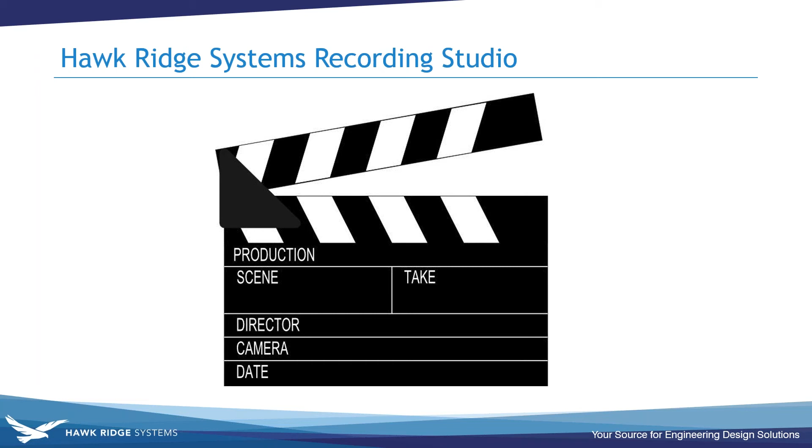Good morning everyone. Let's start talking about our story and what we're going to be going over. Here at Hawk Ridge Systems, we decided to get a recording studio where we feature different products, interviewing the product managers and specialists in a live camera room, and then create video footage over it.

In doing this, we've done a couple test runs already, and I work with the product managers here a lot, and some people tend to get more camera shy than others. So we've decided to come up with getting a teleprompter, so they can look more into the camera. A lot of the time when someone's in front of a camera, they look down, or up, or to the left, and we really want them to focus on the camera.

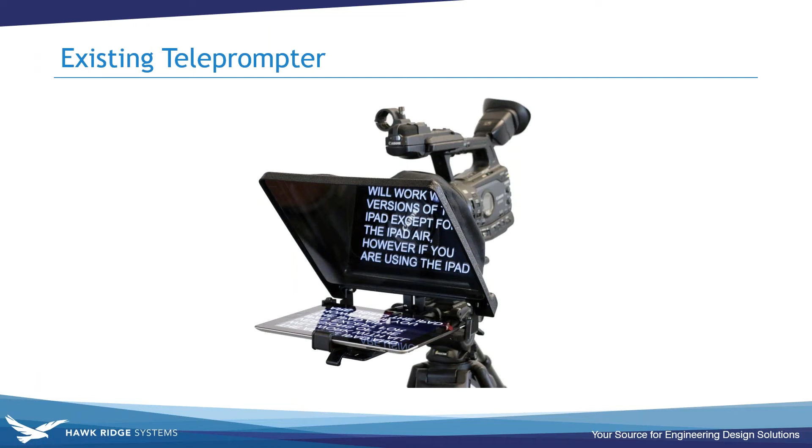To help gather their thoughts, we decided a teleprompter is a good way to go. We're able to mount something on the tripod to the camera in between there and have it extend out past. Here's an existing one I can purchase online, but I decided that we have 3D printing here at Hawk Ridge Systems as well, so I should be able to design something just for the needs that I have at Hawk Ridge Systems for an iPad teleprompter.

So I went ahead and called our 3D printing expert, Luke, for some advice. I've never actually designed to print before. I come from a machining background where I was working more in CamWorks, not on printers. So Luke, I'm going to pass this on over to you.

So I showed this all to Luke, and he was able to help me out and give me some insight before I went in and started my design.

Yeah, so when talking to Holly, what I decided is I wanted to print an end-use part, and the technology I wanted to use was the HP Jet Fusion 4200 printer. The reason is this prints end-use parts. Before, with a lot of 3D printers, they were more for prototyping - they would degrade over time, or they were weak, or they just weren't accurate enough. So with this new technology, it's great: you print it, you prototype, and you can go into production with the same printer and the same part.

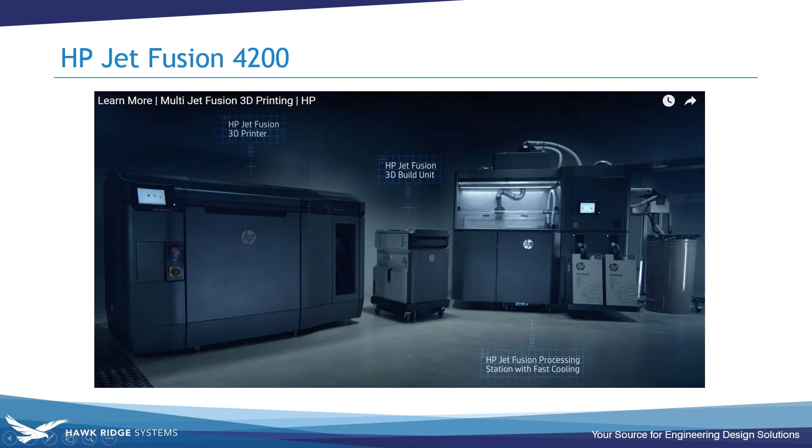What we're looking at here is actually the whole solution for the HP printer. So it's a printer, and you'll also have two of these build units. You can have one of the build units in the printer printing, while you have another one in the post-processing unit. What the post-processing unit does is, one, you can recycle all the powder out of your build that's unused. It'll take that powder, put it in the drum off to the side, and you can reuse that for the next build. So for your next build, when you put the build unit in, you can repack it with 80% recycled material and only 20% new material, and that dramatically drops the price of printing.

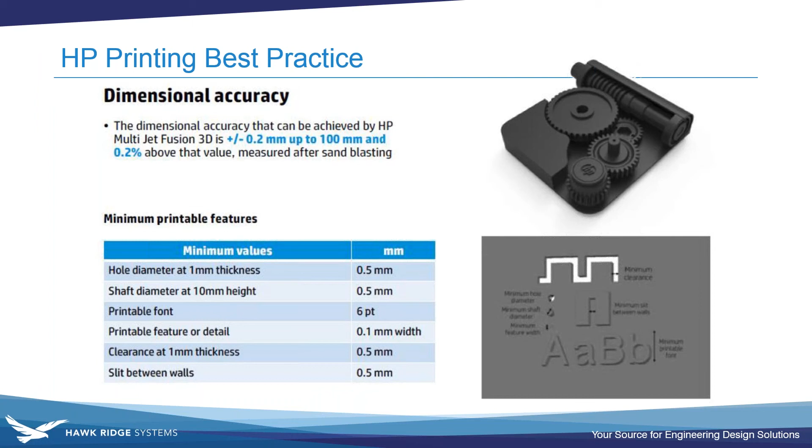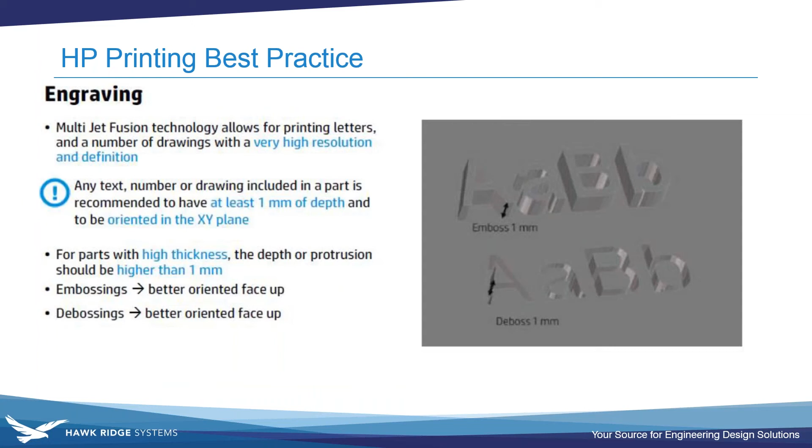The other thing HP has done is they've actually built best practices, so you can read all the best practices and design around what the printer can do, so that you get better prints faster, with less need to reprint something. One of the first things to know is how accurate this printer is - about 0.2% accuracy. So if you have something that's 100 millimeters, it may be plus or minus 0.2 of a millimeter. That's easy to design around once you know that limitation.

Another thing to know is if you're engraving or embossing any type of lettering, how small or how big do you need to do this? With the HP printer, it's about 1 millimeter either way.

The other thing that's very important is wall thickness. Is it an unsupported wall or a supported wall? How much weight does it need to support? And how thin can you go?

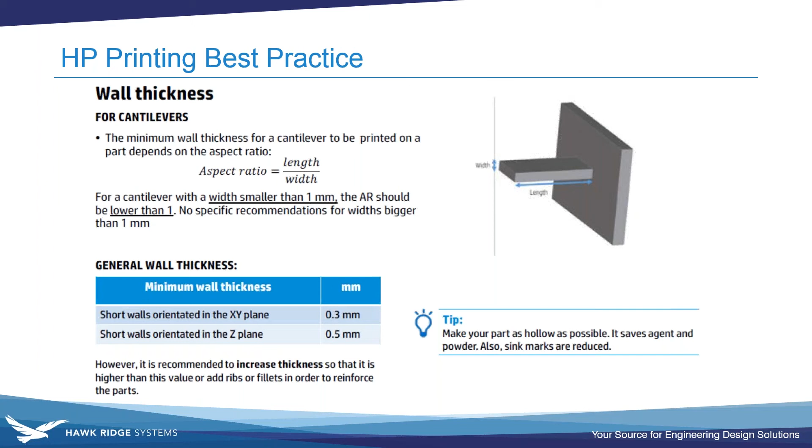So if it's unsupported, I recommend to Holly: do not make anything under 0.5 of a millimeter. Once we print that first prototype, we can adjust it from there. And if it's a supporting wall, we'll make it thicker as needed.

Something to keep in mind with prototyping is you never get anything right on the first try. You got to be willing to print once, look at what you did wrong, and then print another. With 3D printing, it's not about getting something perfect—it's about finding your mistakes fast, making changes, and then carrying on.

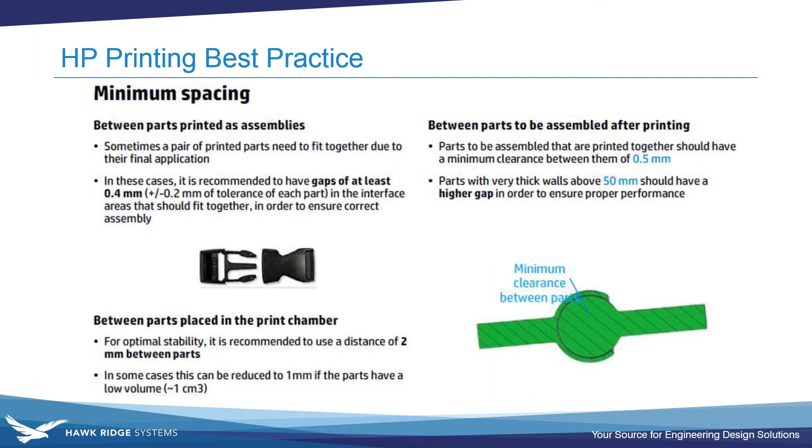The other thing with HP is you can actually print assemblies. So you can have this green part over here—if you had a ball joint or something, all you need is 0.5 of a millimeter distance so that they're not joined together. Then you can have a functional assembly, as long as you design it correctly within SolidWorks.

The minimum gap clearance you'd need is 0.5 of a millimeter. Something else to take into account is what's going to go in between there during the printing process: uncured powder. So you'll need a way to get that powder out. Usually I recommend having a little hole or two that you could blow air in, and then another hole so that powder can get blown out of. That makes it a lot easier.

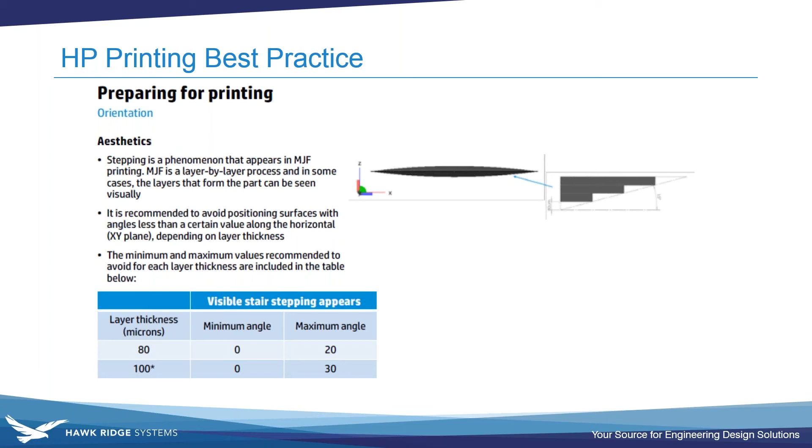Now this is important too—kind of technical, but every printer works layer by layer. If you have something at a slight angle to the build table, say the build table is 0 degrees and you go up only about 3 degrees, you'd see a lot of what's called stair stepping. Stair stepping is that distance between each layer.

Here would be the stair stepping on something that had not a very high degree of angle with regards to the table. How to combat this is to make the part within the build table at a steeper angle. If you had something at a 45-degree angle, for example, these stair steps would be much thinner, and you would hardly notice them at all. That's something we took into account when we were 3D printing this part as well.

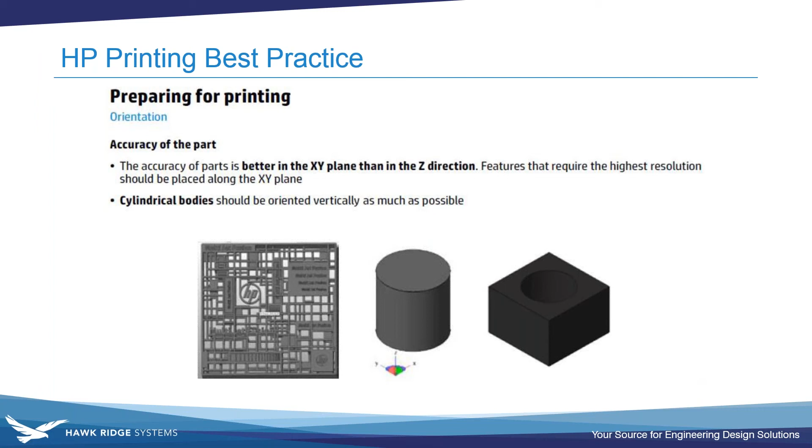One of the last things to take into account when 3D printing is the accuracy and the layer thickness. The layer thickness, like on the previous slide, is about 80 microns per layer. Even higher resolution than that is the X and Y accuracy, which is 1200 by 1200—so you have higher resolution in the X and Y.

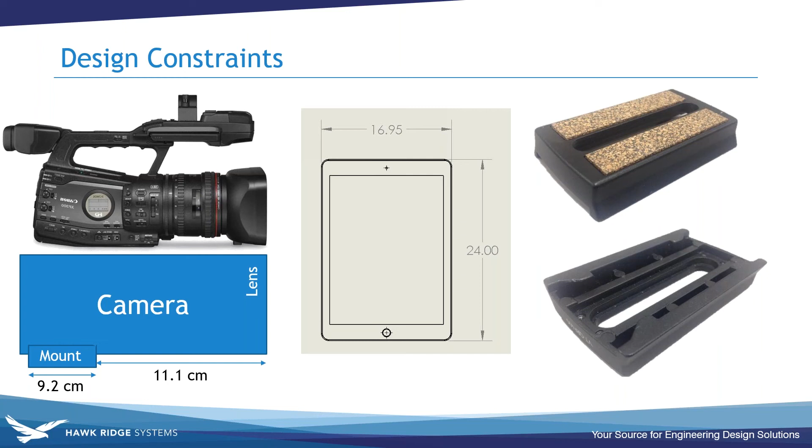So if you needed something that slides together, or needed that higher resolution, you would orientate it in the X and Y plane. With all these things in mind, that's what I suggest to Holly for how to place and design her part so that when we print it, she'll get a successful part. So now I'm going to pass it back to Holly.

Thank you, Luke. So here, just recapping on some of my design constraints, I knew that I needed something that was going to reach the mount and extend past the lens and be able to hold the iPad all in one part. That's another reason why he recommended HP—because it had the build area to fit my part all in one pass.

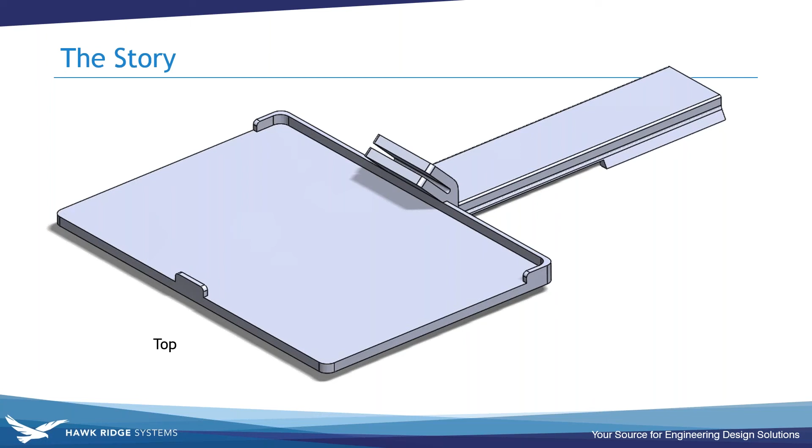So let's take a look. After speaking with him about some of the thickness and constraints of the printer, I realized that my part didn't go below the thickness or anything along those lines. So I was able to design it pretty easily without having to think too much about the actual printing process.

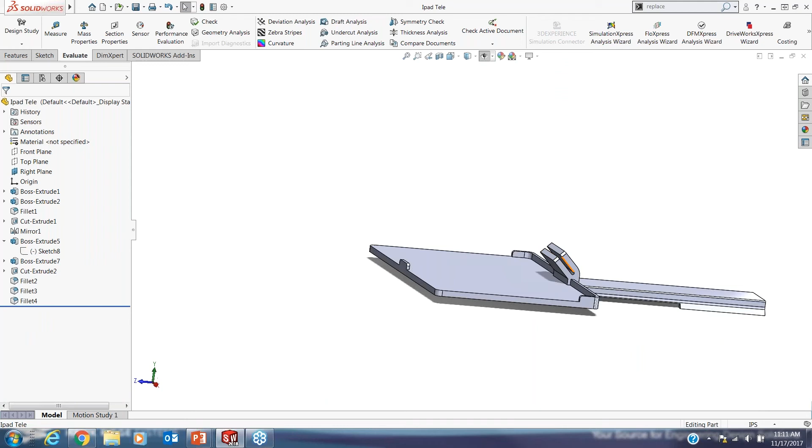So I started off in SolidWorks, and this is really the first draft that I did. Once I got to this point, as you can see, I don't even have the correct holes on this right-hand side for the hardware to come into. I decided to give Luke a call and ask him what he would recommend. I'm at this point, I have my distances down, those basic constraints—what are some recommendations that you would have?

So if I jump back over to SolidWorks, let me get over to this part. This was my first one.

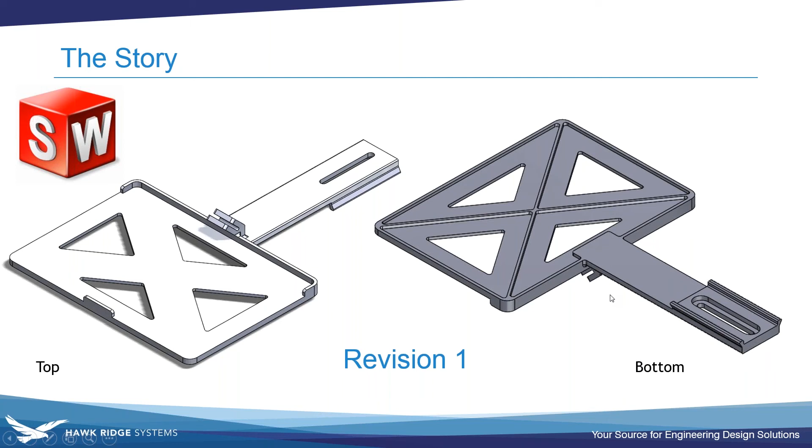You can see along the bottom I have just some material cut out, a little tray to hold the iPad, a slot here to hold the glass at a 45, and all of my distances set up. Luke said we could probably save on material and make it look nicer by removing some material on the iPad tray. So I took that into account, went into SolidWorks, removed material, and added ribs along the bottom for extra strength. Then I finished cutting out the material for that bracket. We'll jump back over to SolidWorks and take a look at that part.

If I rotate this around, I added some fillets to clean up the look for the print. We don't want any sharp edges in there. We can see my ribs along the bottom and then my two slots.

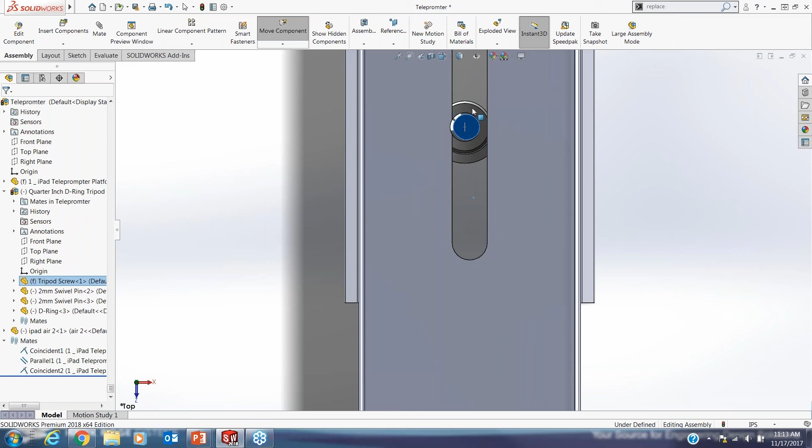I dropped this into an assembly to make sure everything was going to work out correctly. So I have a model of an iPad, dropped it in, checked my tolerance here. I wanted a little bit of space on each edge so that it doesn't have to snap in - it just sets nicely in that tray.

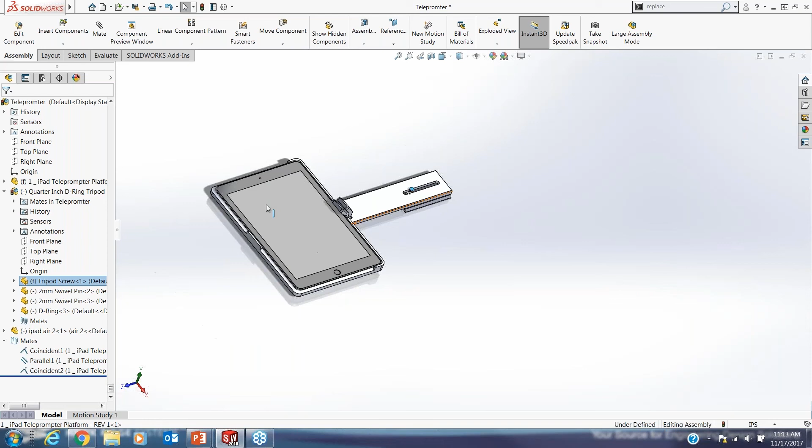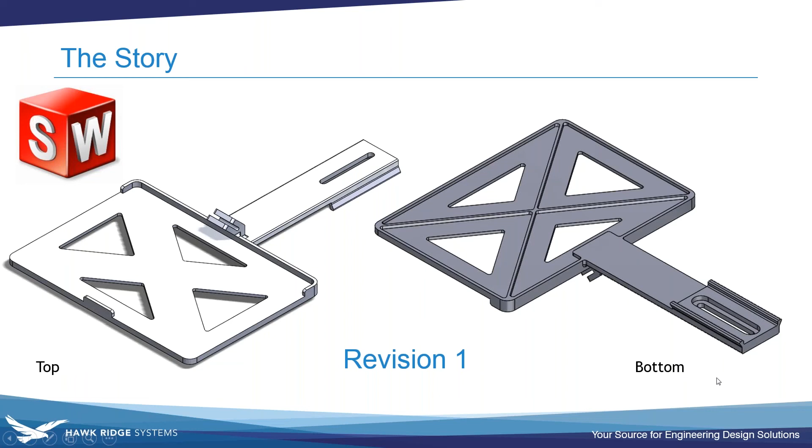I also added in this hardware piece, so I can see that it's going to fit on this side, it moves around a little bit. If I rotate this around, I can see this turning rod - I was able to clamp down and it was going to clear my model. For me, I thought I was ready to go, that this was going to be good. I was 100% not even going to have to redesign.

So I sent it on over to Luke. Luke comes back and says, okay, a lot of our tight constraints were kind of in this bracket area, so let's go ahead and do a test part. So here's our original bracket, and here's my test part. There is some difference between the two.

Once I got my test part, this helped save on material because we knew we needed things to fit in this section. I took it up to Orinda, which is where our recording studio is, and that's where all of our hardware was at the time. I realized I could take this screw out of here - that wouldn't be a problem - but it also had this pin in it, as well as this metal bracket, which I actually really like the design of, because if I were to put that entire piece against the camera, it would keep it from twisting.

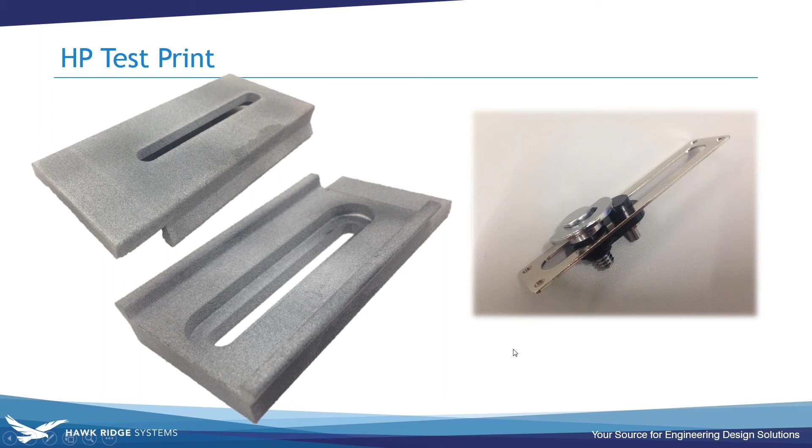So I decided, since I did have a revision I could make, I was going to go back into SolidWorks and actually create this revision and implement it. Heading back into SolidWorks, I redesigned this bottom part.

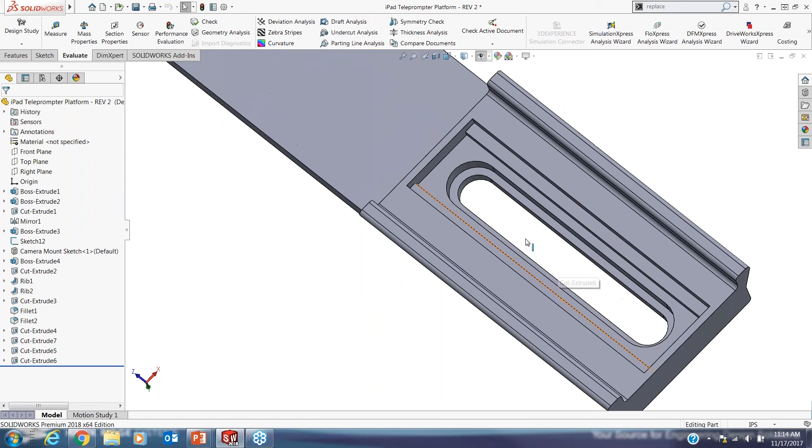We'll head over to that next revision. We can rotate this around, and I still have those two slots. I added in kind of a step there for that metal plate, and then another step for that turning mechanism on that pin to drop back down. So added some more complexity to this in order to make it even better.

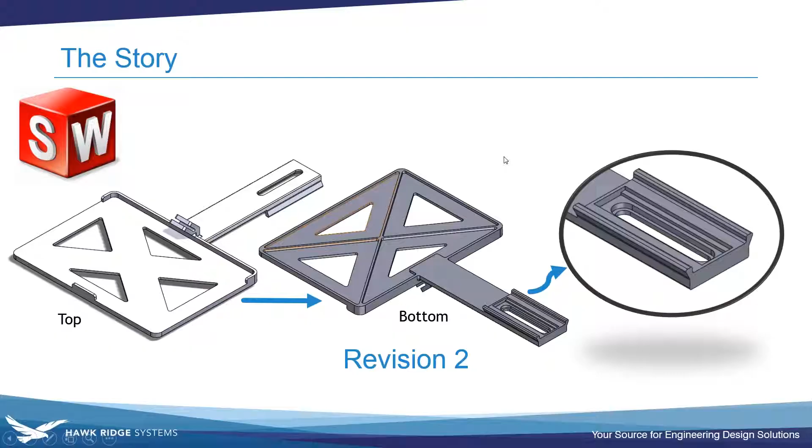That's when we start to head into our actual print. So Luke, I'm going to pass it back over to you. I emailed my part over to Luke, and now he's going to talk about his process on the printing side of it. Yeah, so when she emailed me the SolidWorks part, I opened it in SolidWorks.

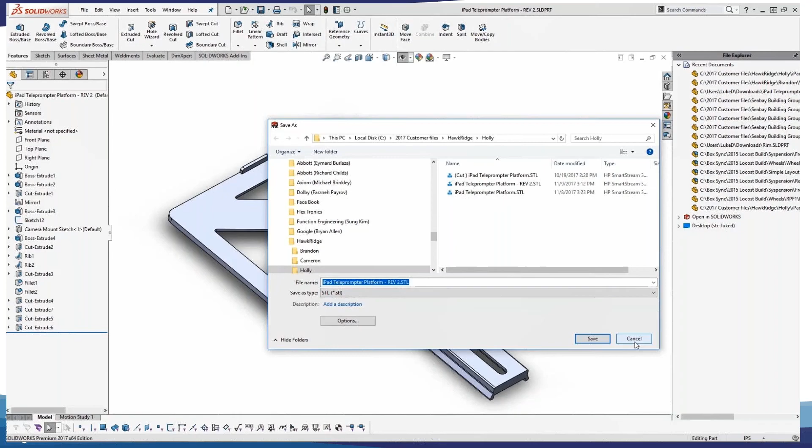To bring it into the HP software, what I first need to do is change it to what's called an STL. So file, save as, find the STL file format, and put it in the correct file location. I made a folder for Holly, dropped that part in there, and then into the SmartStream software I just need to open up that STL. So you can see I'm browsing, and I'm going to find that STL.

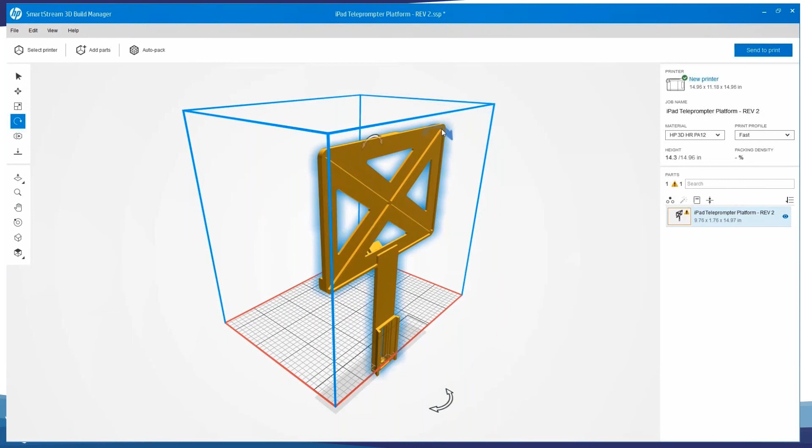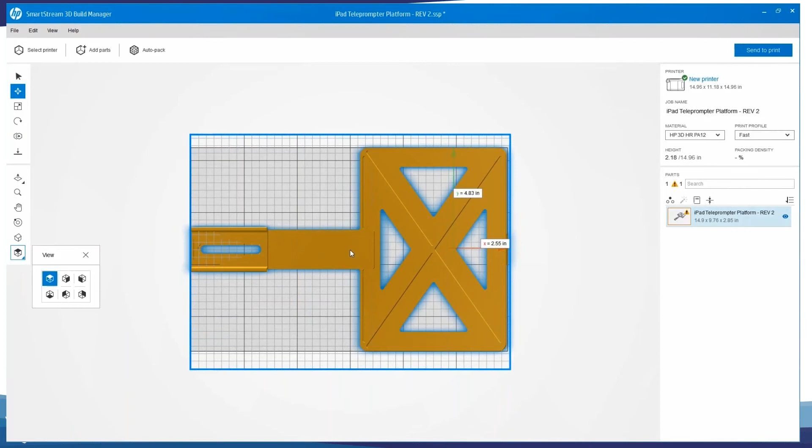It's going to bring it in within the bounding box of what the printer can print. This blue box is the bounding box of what can be printed. It's showing up in yellow right now because it's outside the bounding box, and the red shows which side it's outside on. Right now I know it's below the printing bounding box, coming out at this angle on the bottom side. So I simply rotate some things around and try to fit it in the printer's bounding box, giving it a bit of an angle too, so we can reduce some of that stair stepping I was talking about earlier.

So the next thing I need to do is just raise it up so it's not below the printing bounding box. And there we go.

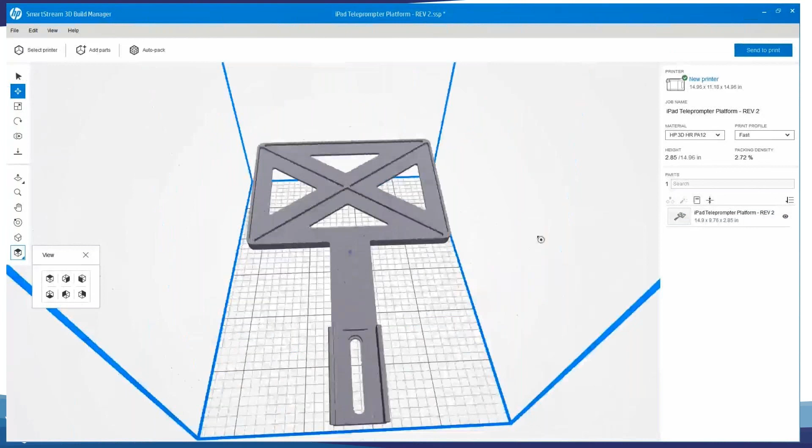Over on the right-hand side, I can see that it's 2.85 inches tall, which is not tall at all for this printer. It can print 15 inches tall. So this is only going to be about a 3-hour print. Super quick, nice and easy.

I don't have to make any supports for this. I could actually add in a bunch of other parts as well, but for this example, I just had this one part. I'll just send it to the printer.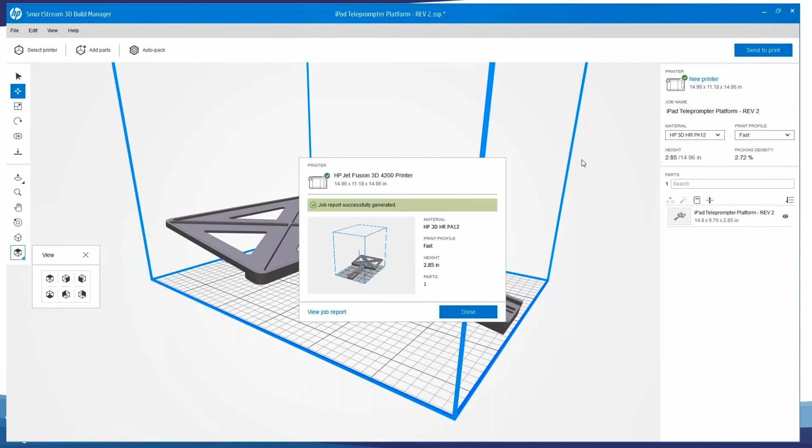And this is something else that's really nice, it's called a job report. These are made automatically, and it's a PDF that you can print out so that if you're not the person doing the post-processing of this part, you can print it out and put it with the printer. Whoever is going to finish the part knows all the details about it, the name of the part, any details of who it should be shipped to, any requirements of paint or anything you need, you can put it on that piece of paper and it can travel with the part.

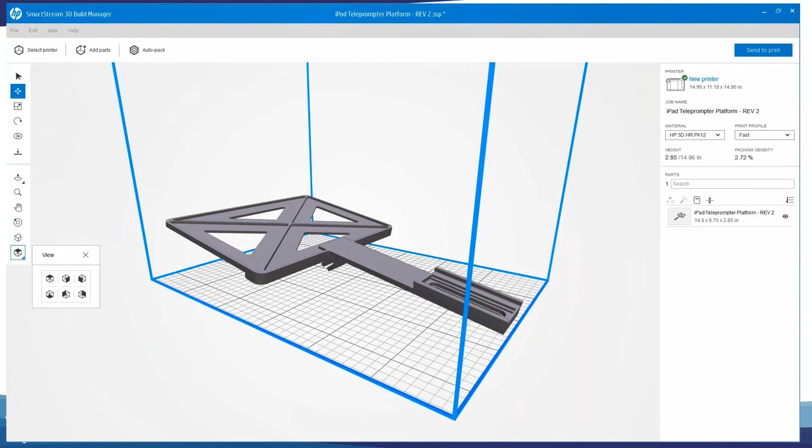So let's go to the next slide here. Again, I printed it on our printer in the office. What's really nice is when it's done printing, I'm going to pull out that build unit, bring it over to the post-processing station, and then I can recycle the powder.

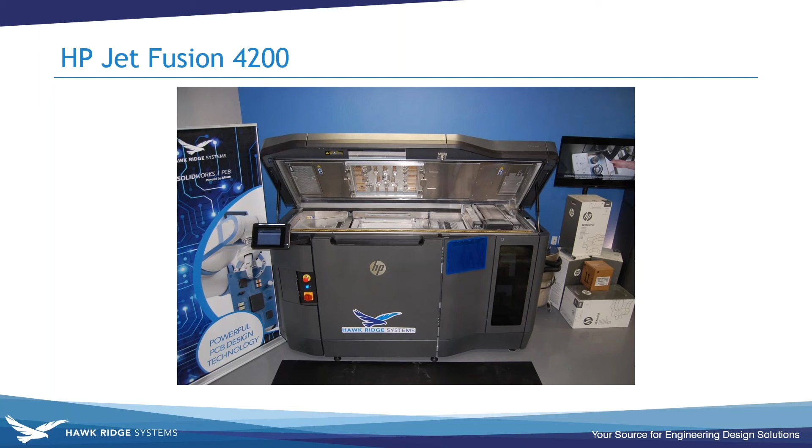So with the next slide here, you can see that I'm loading that build unit into it. And now, this picture here shows me recycling, sucking up all the powder so that I can recycle that and use it on the next print.

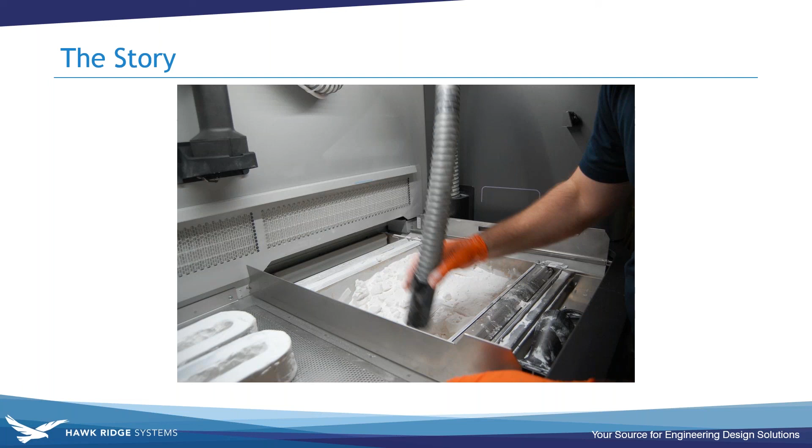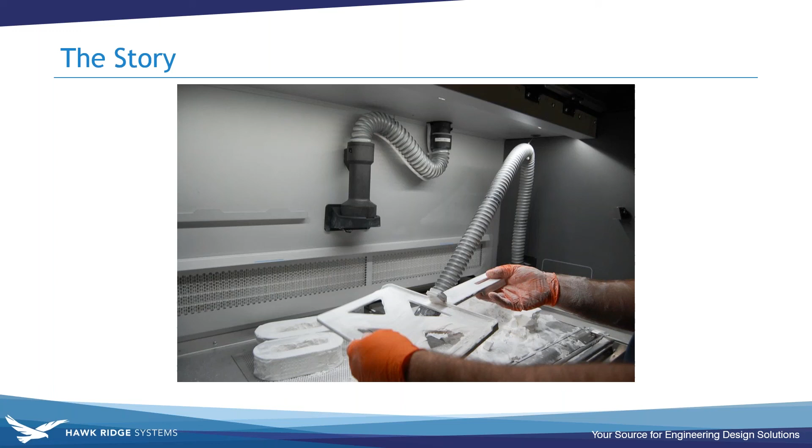And there's Holly's part. So right now, 90% of the powder's off of it. The next step we need to do is just a quick sandblast, and then we'll actually be able to start using our part. That's pretty much all it takes.

So you can see I brought it over to the sandblaster along with some other parts that I was post-processing. I simply sandblast it, and then I'm going to use some compressed air to blow off any of the powder from the sandblaster. And then we can actually install it, and Holly can test it.

I could do some other steps if I wanted to dye it or paint it or do anything like that, but this is just a quick prototype. So this is as far as I needed to go to make sure it fits. So I'm going to pass it back to Holly.

And then, thank you, she will talk about it, Luke.

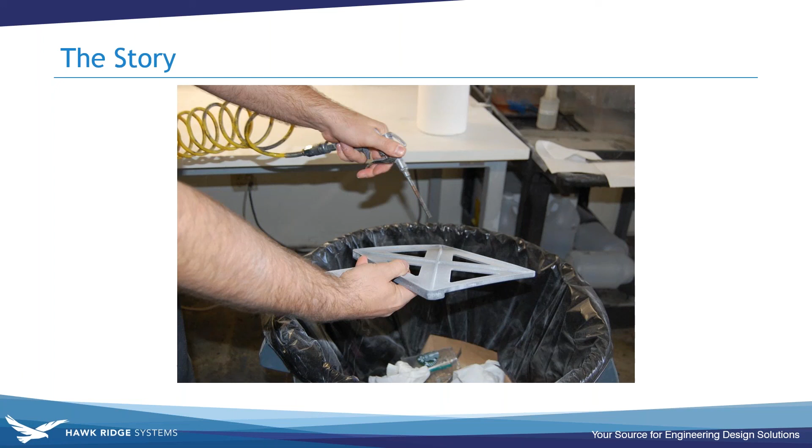It was a snug fit on the bottom and the top. As soon as I put it on this camera, though, I did start to realize that there was going to be some flex. I added the iPad to it, and it started flexing down a little bit more than what I had really wanted it to do.

I haven't even added the glass to it yet, but I was a little scared to because we all know those iPads are pretty expensive. So I didn't want to risk dropping that iPad, so I went ahead and left it off because I could quickly realize that I did have some of that flex.

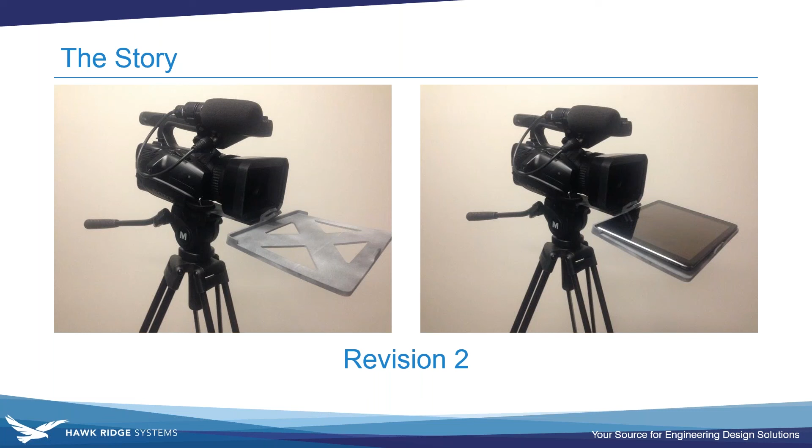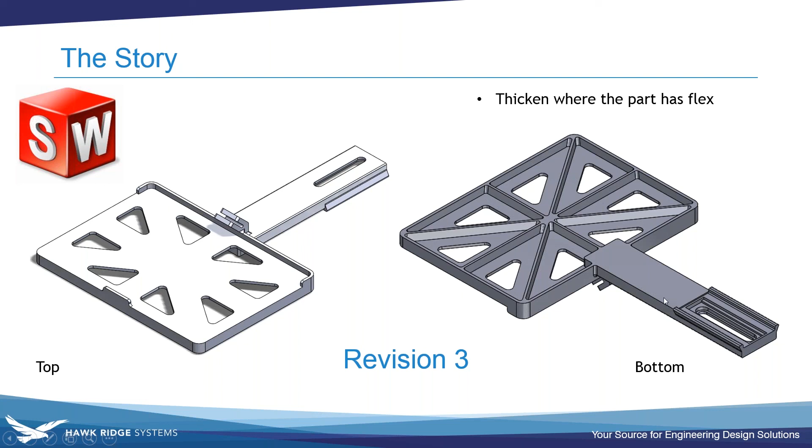And so I wanted to add some more strength to this. So I just went ahead and entered into my next revision. Here I added more material. My approach was to thicken it up, add more ribs, really constrain it a bit more. Let's take a look at that in SolidWorks.

So you can see even visually right away on top, it looks different. As well as if I rotate this over, it's also different. I've added quite a few more ribs.

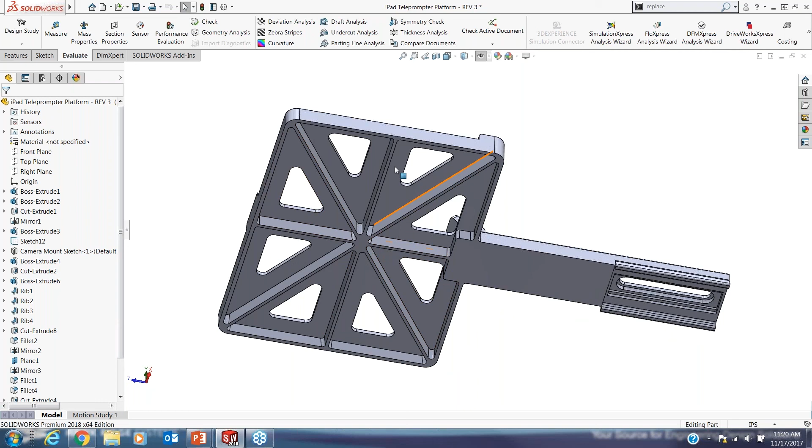To get a better understanding of the true difference of this, we're going to use a tool in SolidWorks called Compare Documents. It's on the Evaluate tab in the Command Manager. I can select Compare Documents. A quick way to do this is to have the documents open that you want to compare, that way I can just select them from the pull-down menu. If you don't have them open, you can always browse.

Just go find them. So we're going to compare my revision 2, and I would like to compare it to my revision 3. Let's see the difference that I added to this. There's different items that you are allowed to compare, there's document properties, which we have not added any.

You can compare features if you would like. I know the features have changed because I just added more features to it. What I'm really interested in is the geometry. That's what I want to look at.

I don't need to align the parts because I left the origin of both parts in the same place. But if you want, you can have two different parts modeled in two different spaces in SolidWorks, line those up, and still compare the documents. So I'll run my comparison, and SolidWorks is basically analyzing the faces and structure of each model, and it's going to compare those and give me the results.

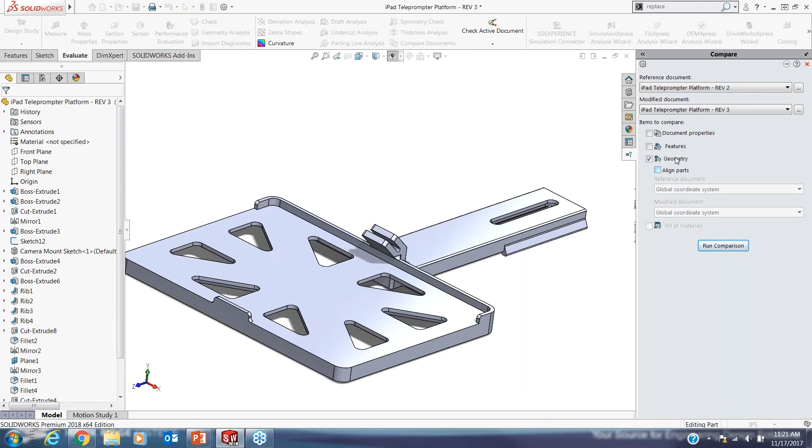So this is nice. On the right-hand side, we can do either a volume comparison or a face comparison, and I can toggle different items on and off. Right now I have the common volume toggled on, so anything highlighted in green is considered common volume among the two. I can turn that off if I want, maybe material to remove.

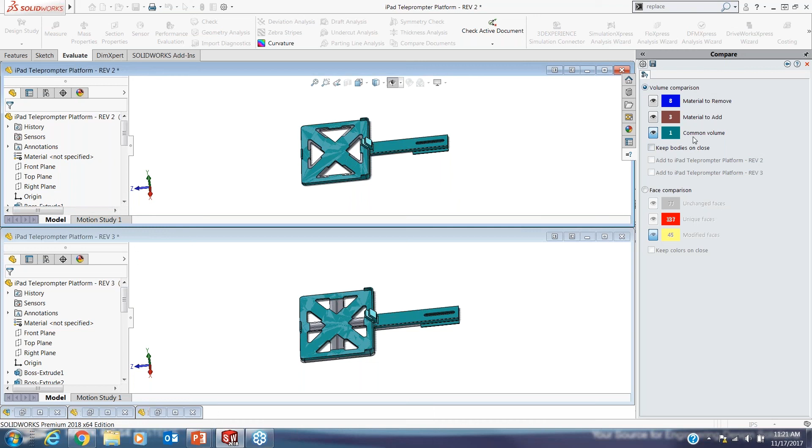We can turn that on, so I can see what material needs to be removed in order to see the other one. I always like to do the material to remove and material to add at the same time, so you can really get a nice difference of those two.

If I look at the side of this one, you can see that material added. I added quite a bit of material along the bottom here to allow for a little bit more strength on that bottom. Rotating this up, you can see I've added material along each of these ribs as well.

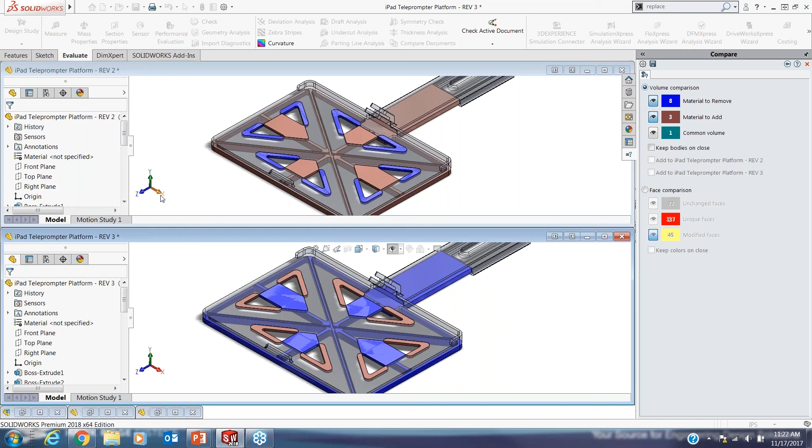Now, if I really wanted to, I could pull in the material properties and maybe run a simulation on it, and probably hollow out some of the material in this section to really reduce that. But printing on this HP, the material isn't high cost. And since this is only one part for my particular need, I don't actually see a need to run the simulation. I'm okay with just allowing that extra material and kind of over-designing this model.

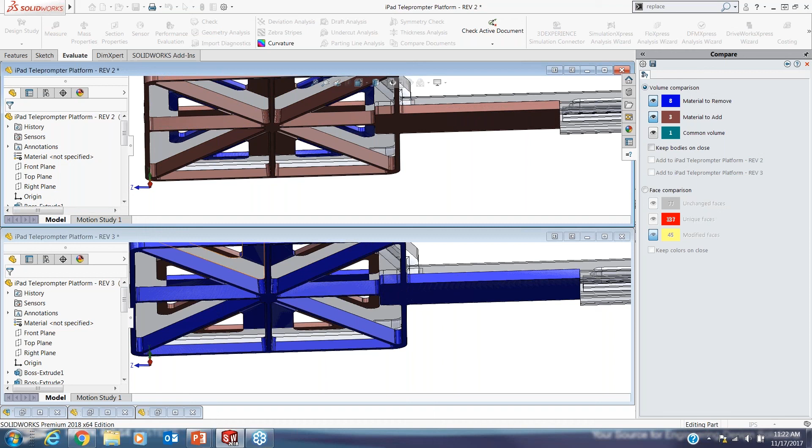Now, this was just my approach to bringing this up and making it a little bit stronger. When Luke and I were discussing this, he had a completely different approach and a different idea, which I thought was pretty interesting. Luke, would you want to share that with everyone?

Yeah, so there's no perfect way to design everything. People always have different ideas, and mine was to actually go to Home Depot and buy a steel rod, and then we would make a hollow shaft inside it. We would 3D print it and then slide in that steel rod, and that would be the added strength. It would accomplish the same thing, but just two different ways of going about it.